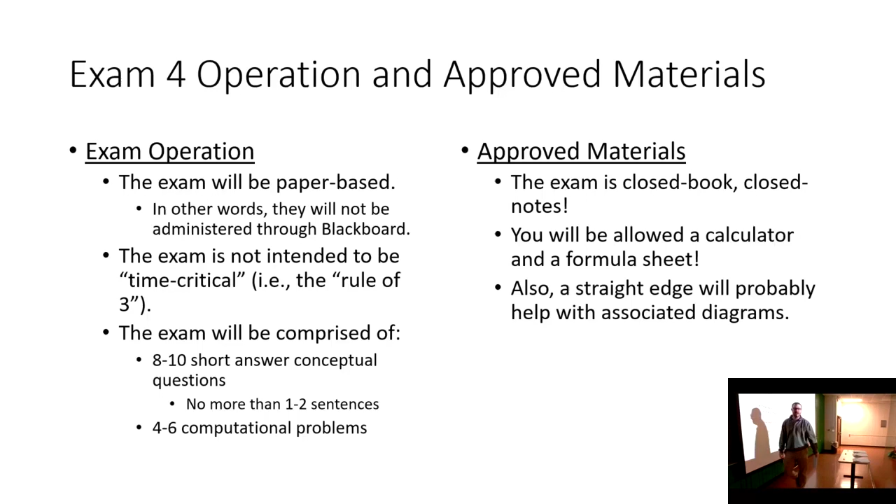Okay, so first off, the logistics. We're doing it in here, in person, on paper. It is about twice the length of a normal exam, and it is comprehensive, all right? It'll have about 8 to 10 short answer questions and about 4 to 6 computational problems. That's what you can expect. The exam is closed book, closed notes. You can have a formula sheet and a calculator, and I do think you should bring a straight edge. I think that would help. On the formula sheet, same rules as before. You can put anything you want on it.

I am going to make a slight addendum to this. When I say collect them after the exam, as you're turning your exam in, I'll take a look at them, and I'll probably just give them right back to you, because I want to make sure that you have your formula sheets in your notes for later courses and whatnot. The finals I keep, but the formula sheet I'll let you have. You don't need to waste time on your formula sheet with properties of centroids or things like that. I will provide those on the exam if needed. Don't include any fully worked out problems, and make sure that you prepare it yourself, that you're not just snipping stuff out of the slides. Although at least these slides will give you a good little guide on what to put together. Here's the class, and here's what's on the exam.

So first off, we started with the fundamentals. So make sure that you understand classical motion. Make sure you understand Newton's 3 laws. Make sure that if I give you the mass of an object, that you can compute its weight by multiplying by g, the acceleration due to gravity. Make sure that you can convert units and perform dimensional analysis as appropriate. And really the key math concepts in the class are algebra and trig. We did a little bit of calculus. We needed it to understand centroids, but really algebra and trig are where it's at. The first main exam was on particle statics, and basically what that was about was adding vectors.

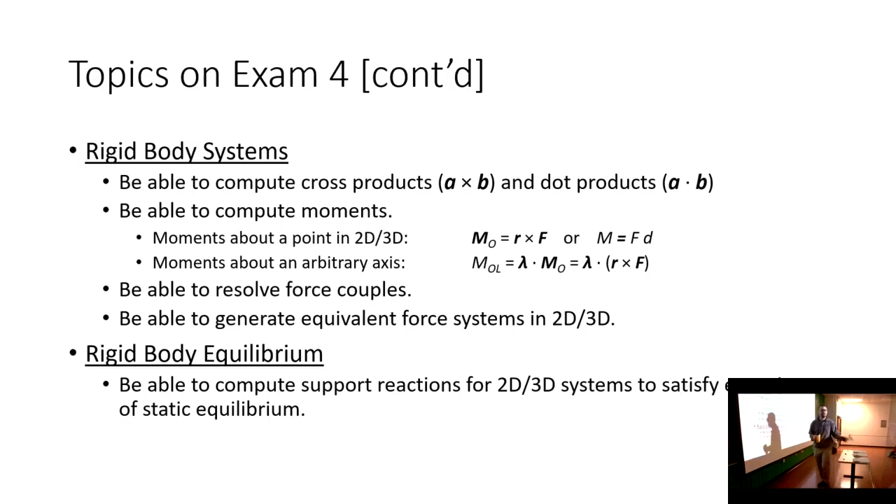And I mentioned this on the recording I posted last night regarding the exam, but if there was any one topic I would urge the class to study, and we're going to probably do some problems Friday devoted to this, it's support reactions. Because if you get the support reactions wrong, then the truss analysis or the shear and moment diagram is not going to be right. So it's a really critical step in the analysis.

Speaking of, excuse me, sorry, my voice is still restoring.

Exam 3, the name of the game was centroids and structural analysis, so make sure that you can locate the centroid of areas, lines, and volumes, and that you can compute the moment of inertia. Structural analysis, again, support reactions, big important step. Make sure that you can compute the internal forces in members of plane trusses using the method of joints or sections, and that you can draw shear and moment diagrams.

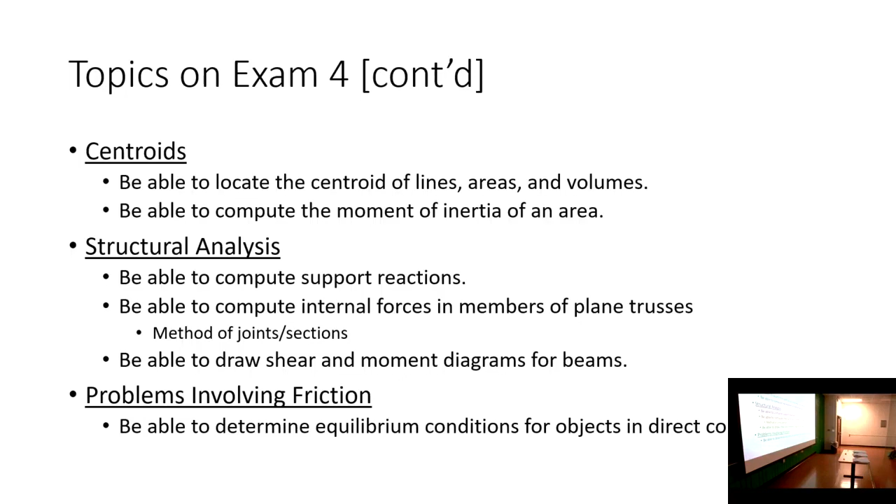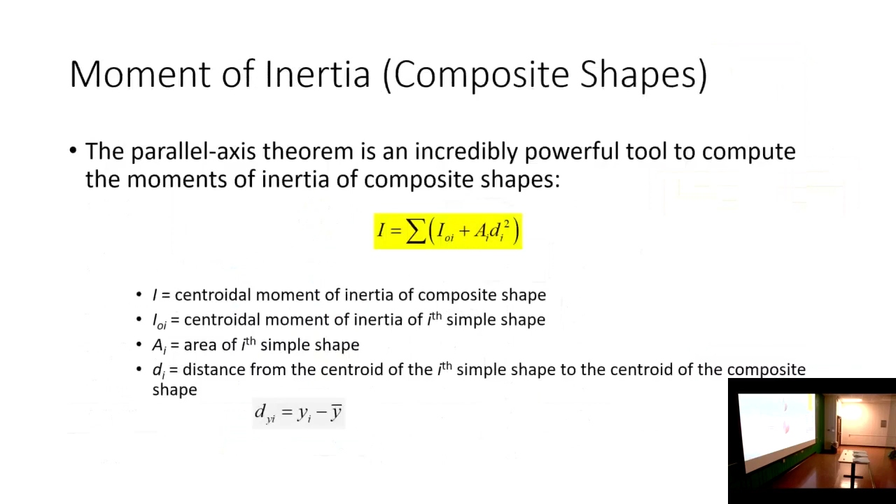The only real new topic is problems involving friction. So make sure that you can determine equilibrium conditions for objects in direct contact. So that is the content of the exam. That's what the exam is going to cover. The rest of this is just a lot of the formulas and equations that we've used throughout the semester. I'm happy to go through this in detail, but we've seen all this before, and I have this slide deck posted on Blackboard right now.

Does anybody have any general questions about the exam logistics, about what to expect on the exam, anything like that? I'd be happy to address them. Yes? I think for the short answer part, looking at the short answer questions on the other exams is a good idea. It's not a bad idea. The other thing I would suggest is just to go through the notes. We did have certain lectures that were a little more content heavy than others.

So for example, when we were getting up to exam 2, we had a lot of lectures that were about defining moments and defining the equations and cross products and dot products. And then later on, it was just, okay, let's just do a bunch of problems. So it might be worth it to focus on reviewing those types of lectures, the lectures that were earlier on in the modules listed on Blackboard. So for example, if there's topic 2 on particle statics, maybe the first couple lectures as opposed to the last ones. Does that make sense? That makes sense, everybody else? But yes, I will say that the questions that you will get on the exam are very much like those that you got on the last 3.

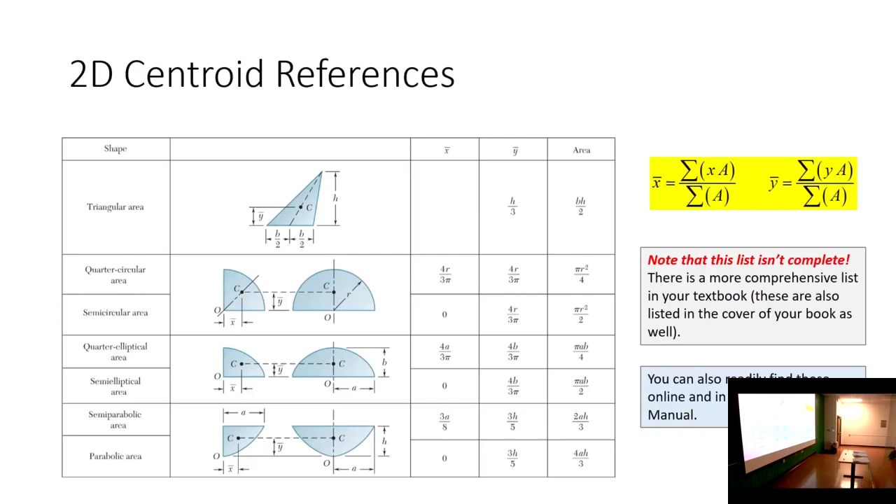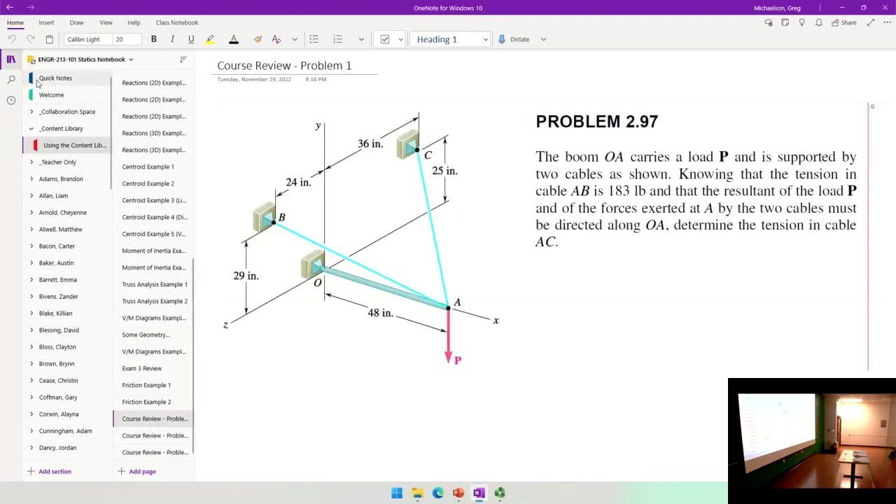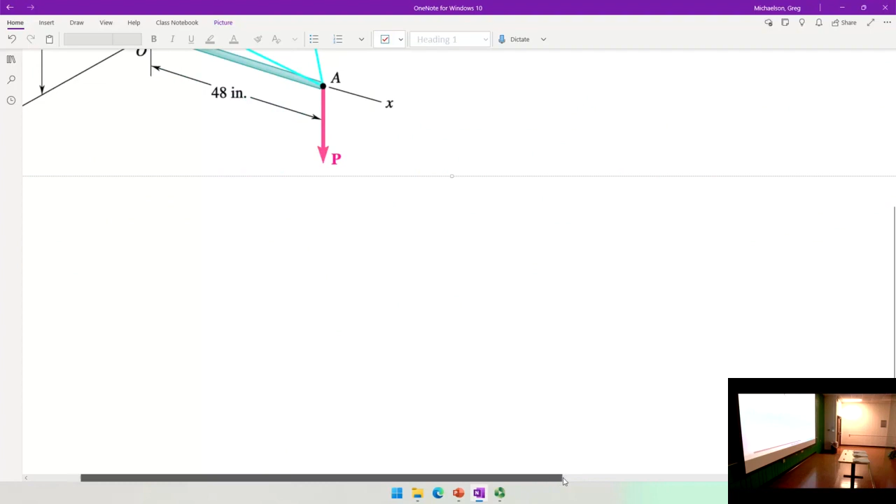All right, since we're here together at 8 o'clock in the morning, let's do some problems. Now, I've prepared 3 problems. There's a good chance we won't get through them all. And I'm going to go ahead and tell you, these are among the trickier problems that I would give you. These are probably more difficult than some of the ones I've given you even on homeworks. But again, the idea is that if you can do these, you can do just about anything.

All right, so let's start off with this one, okay? So the first thing I should mention is that I will say one thing, if this helps. Bless you. I am not one to give a comprehensive exam out of order, okay? So the first problems are going to be about the first stuff in the class. The last problems are going to be about the last stuff we talked about. So, as an example, the last computational problem will be the one with friction. Does that make sense? So I won't put a friction one in the middle of the exam. I don't like doing that. So this is an early part of the semester problem.

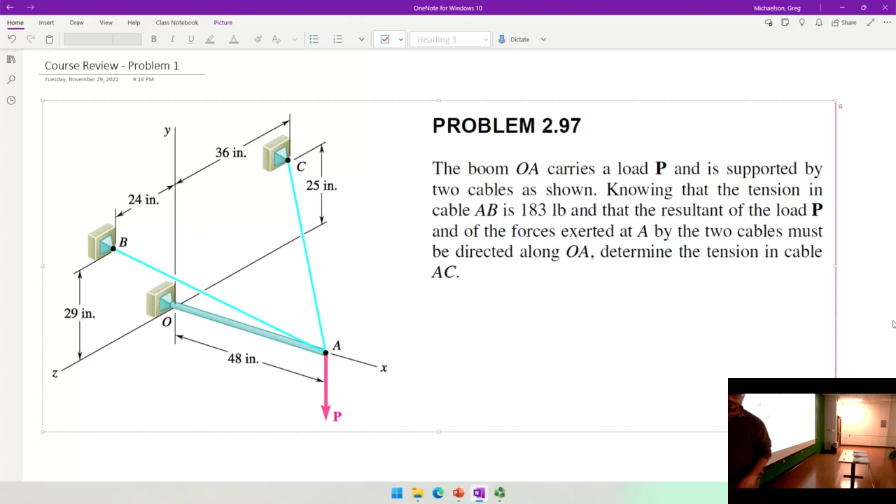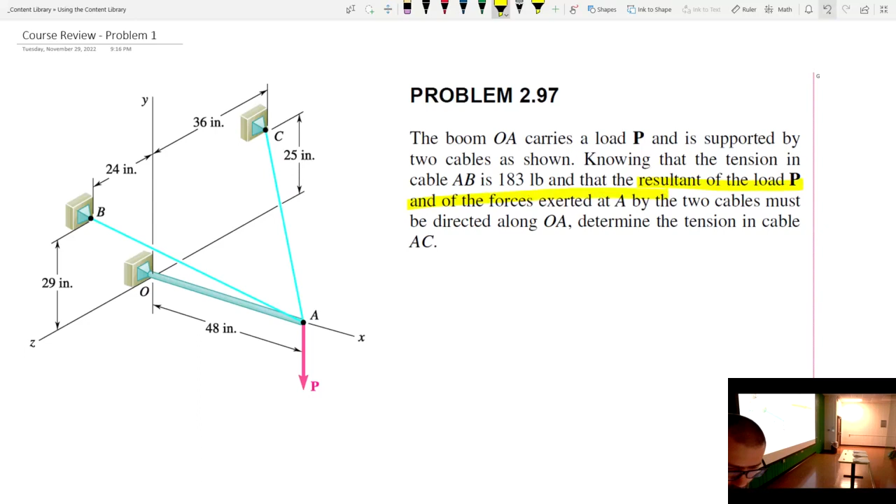So I have a boom that carries a load P and is supported by two cables at point A shown. Now we know the tension in this cable right here is 183 pounds. And we know that if we add up these three loads, read this right here. This is a really key statement. I'll highlight it. Let me get my little pen here. Oh, I can't draw a straight line.

We know the tension in this cable is 183 pounds. We do not know the tension in this cable, but we know that the resultant of the forces exerted at A must be directed along this line. Based on that knowledge, what is the tension in AC? And I'm sure some of you are like, whoa, what is going on here? Okay? Let me show you what's going on. So, a couple notes.

This is a particle statics problem. In other words, here's point A. We have this P vector, TAB, and TAC. So I'm drawing this point right here. We have forces all going through point A. So this is a particle statics problem. So there's no moments. If you look at this problem and think I got some moments, you're doing something wrong. Okay? So that's the first note I would mention. The second note I would mention is this highlighted portion. Okay?

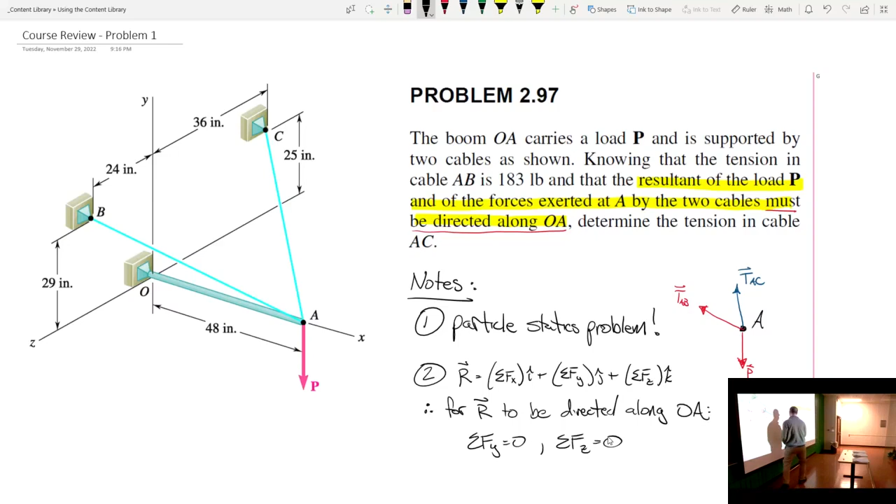Along what axis is OA aligned? Say again? The x-axis. OA is along the x-axis. So, for R to be along x, these two have to be 0, right? Because the resultant will only be along that axis. So those two have to be 0. So with that, we can do some work.

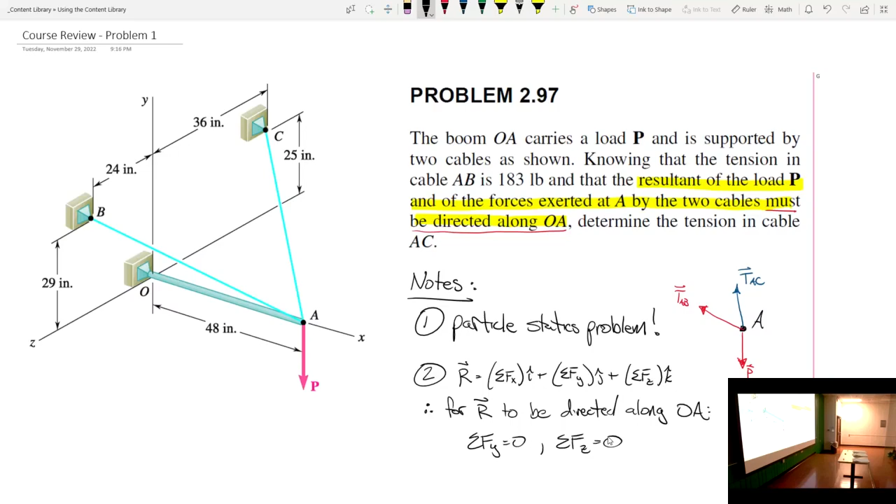The first step is to describe the vectors in 3D. Okay? And actually what I should do is make sure that we're clear. Describe the force vectors in 3D. Now, how do I describe a force vector in 3D? I first define its distance vector, divide that distance vector by its own magnitude, then multiply by the magnitude of the force to get the force vector. Okay? So let's describe AB and AC.

All right? So AB. So let's see. Along the x-axis, we go negative 48. Right? Along the y, that's vertical, we go up 29. And then along the z-axis, we go 24. Does everybody see that? So 48 along the x, along the y, we go up 29, and then along the z, from here to here, it's 24.

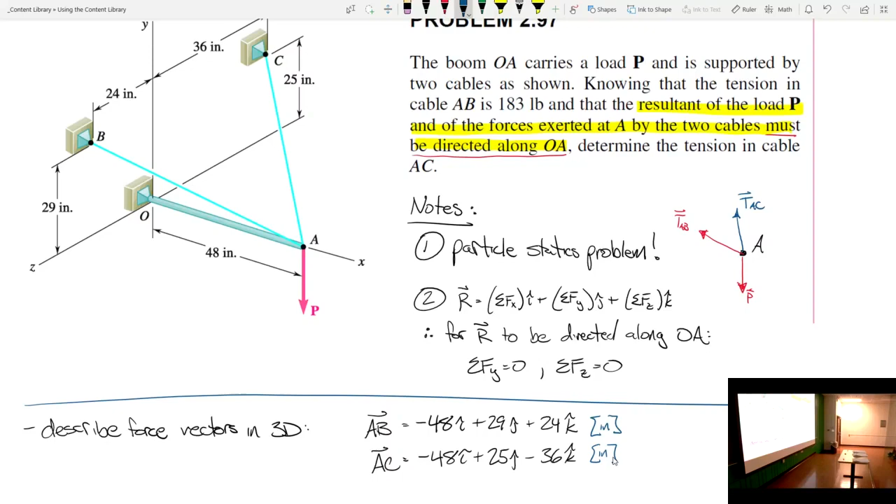For AC, it's still 48i. Now our y changes. Instead of 29, it's 25. And now we're going negative 36 along the z. Is everybody okay with that? All right. So what we'll do then, determine the magnitude of these.

And given the fact that we're just doing some review problems and that I know that you all can do these calculations, I'm going to do a lot of these computations for you. So when you chug this one out, you get 61 inches. So therefore, lambda AB is just going to be that.

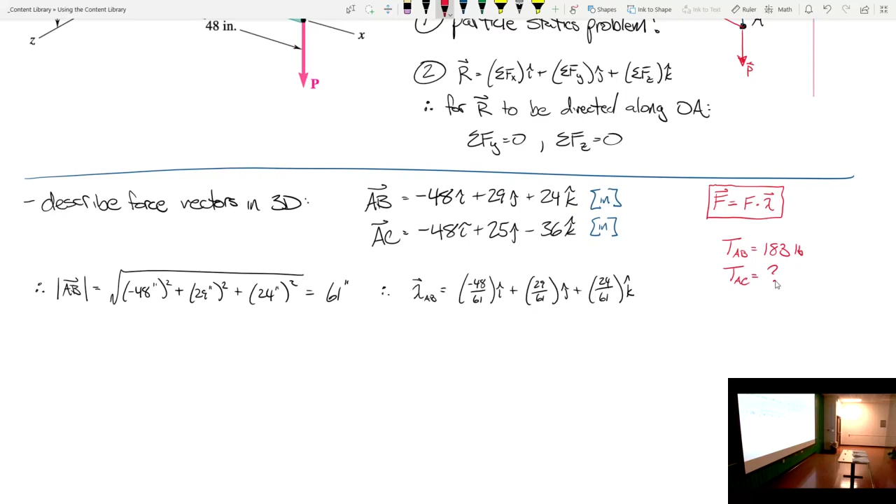Now, in this problem, let's be clear, all right? Let's just remember a couple things. We know that a force vector is equal to the magnitude of that force times the unit vector, right? That's our base expression that we're using, okay? We know, in the problem, that the tension in AB is 183 pounds. It's tension AC that we don't know, okay? So what that means is, if I want to determine that force, I can go ahead and numerically evaluate it right now.

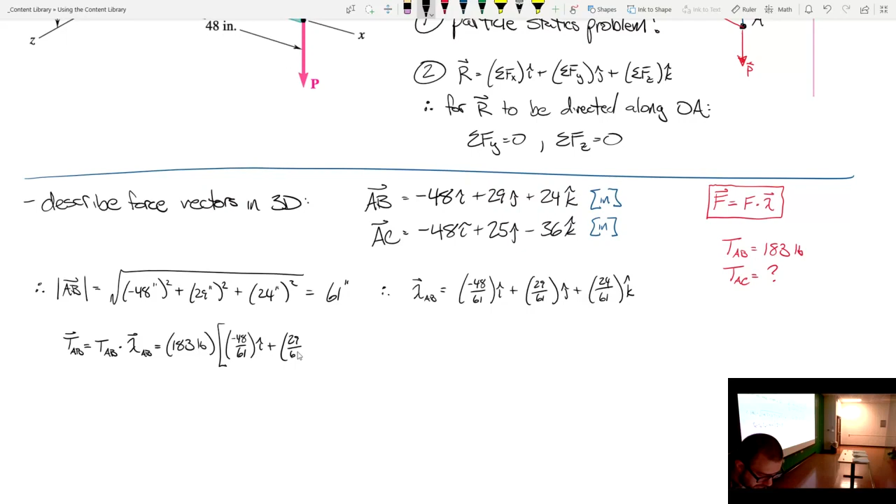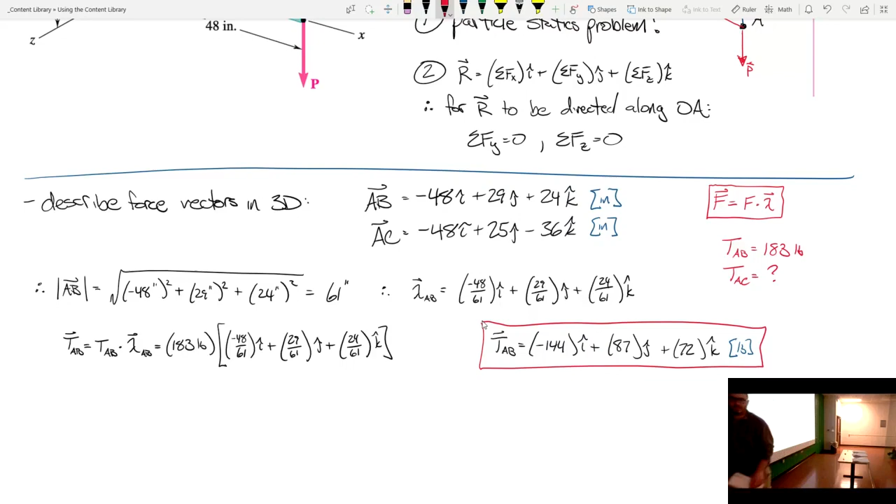So checking that out, I get, it's actually pretty nice. Comes out in nice even numbers. So that's one of my vectors right there. Do the same thing for the next vector.

As I'm going along, is everybody following along? Is this too difficult? If you have any questions, please interrupt me.

So we determine the magnitude of this vector. And when you plug and chug this, you also get an even number. You get 65 inches. All right. So now we're going to do the same thing. The only thing is that we don't yet know what the magnitude is. So we're going to have to leave that as a variable.

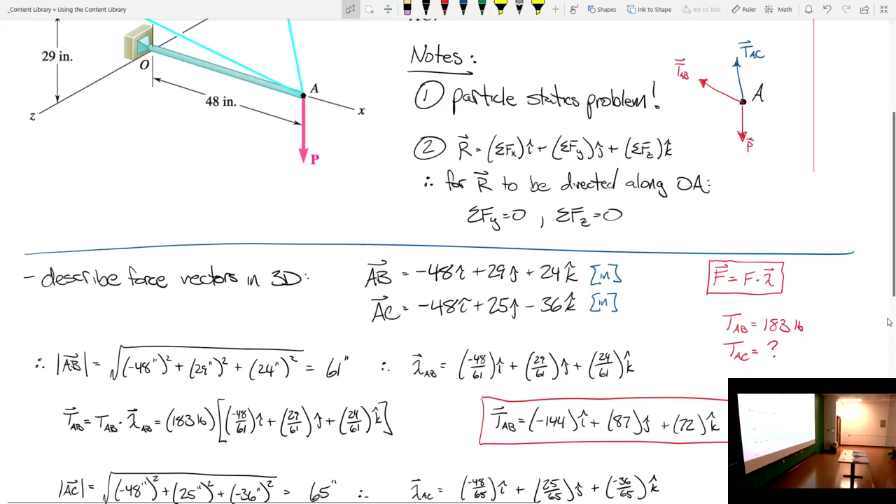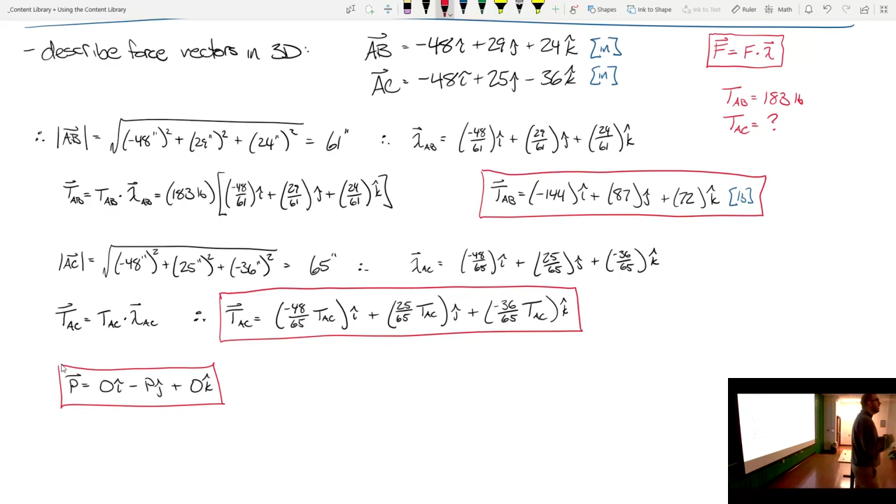Now let's not forget, there are three forces acting through this particle, and one of them is P. So we have to describe that one as well. But P is really easy. He's just that. Because it's just a force acting vertically along the y-axis. All right, is everybody with me so far? Is this making sense? Tell me if it's not, please.

Okay. So now what I need to do is sum these vectors up in order to determine a resultant. Okay? So what I'll do is I'll write them sort of tabular. That's an I. And so what I'll do is sum each of these up. But instead of writing all this out, let's just be common sense about it.

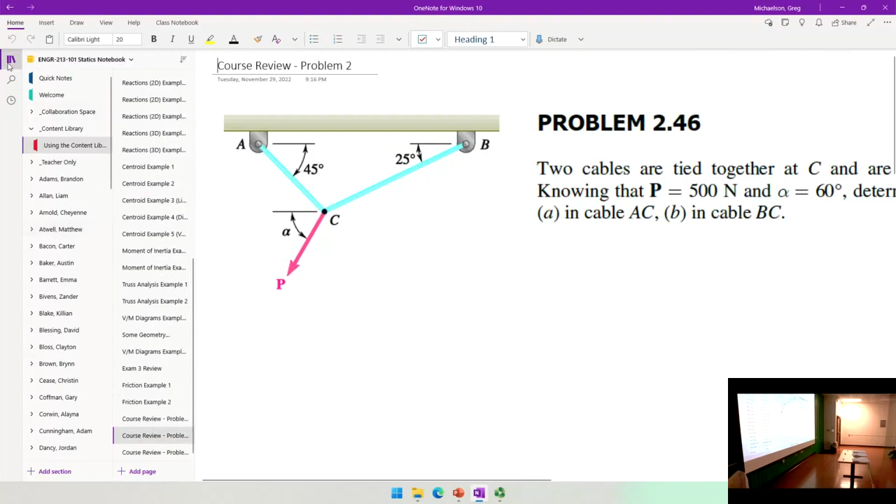All right. This one's probably not as challenging. It's pretty straightforward. But everything's at an angle, so we just got to be cognizant about some things. Now, the last problem was not an equilibrium problem. This one is. This one is a particle statics equilibrium problem. I'll say notes.

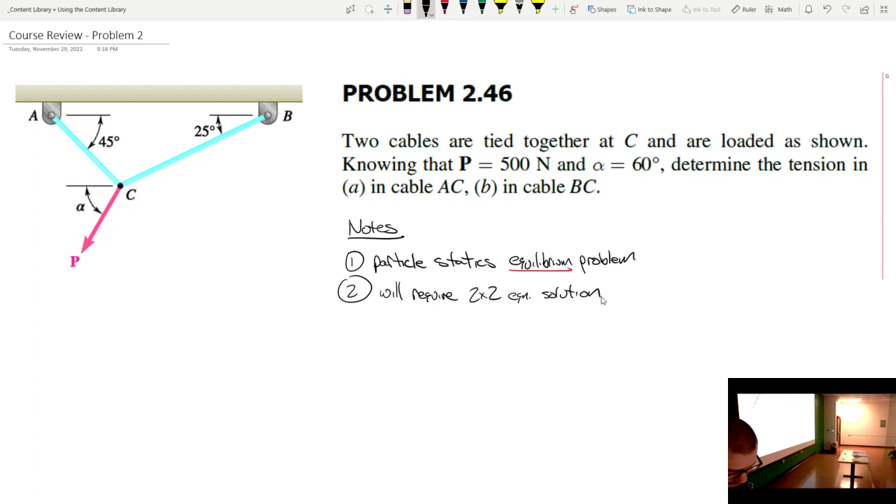It'll require a 2x2 equation solution using IJ notation. Now I will go ahead and tell you, you can actually get around using an equation solver if you use the law of sines and the law of cosines. I get the feeling y'all don't want to do that, so we'll do it the standard way, which is fine.

So we'll start off with a free body diagram of particle C. So what that means is we need to draw particle C and all of the forces that are going through it. So, tension BC. That's going to be a 25-degree angle, right? Because if I have a parallel line cut by a transversal, and I know that's 25 degrees, I know that's 25 degrees.

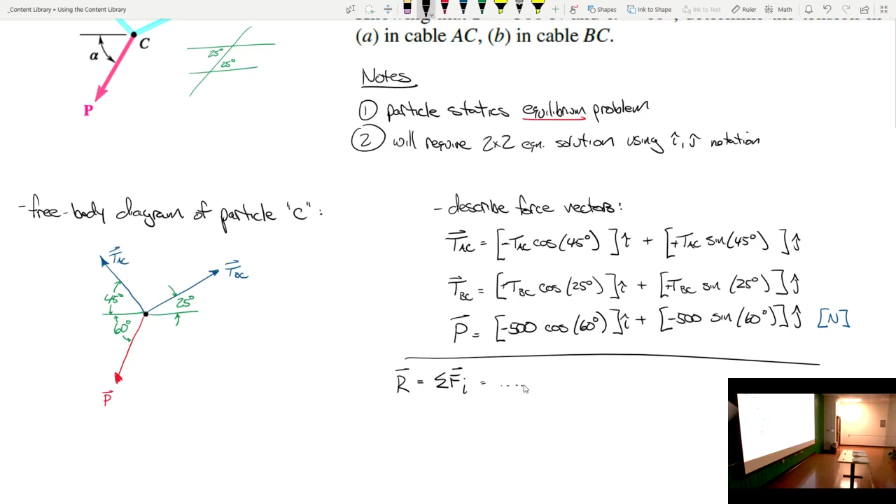So we need to sum these up. Again, what we're doing is summing the forces in the x direction, summing the forces in the y direction. But this is a static equilibrium problem. We know both of those sums have to be zero. So, down just a little bit. And again, they have to be zero.

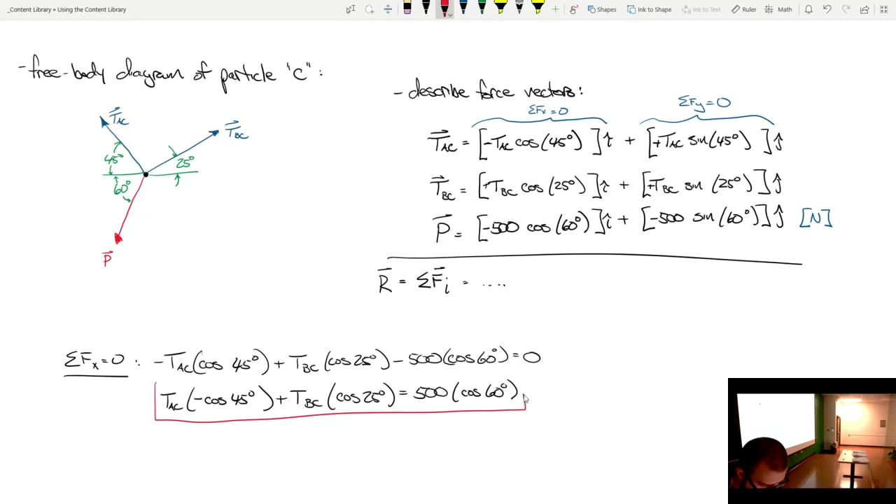Now what I'm going to do is I'm going to write it in sort of matrix notation. TAC. There's our first equation. We scroll up a little bit so I can still see what's going on. So just move that over.

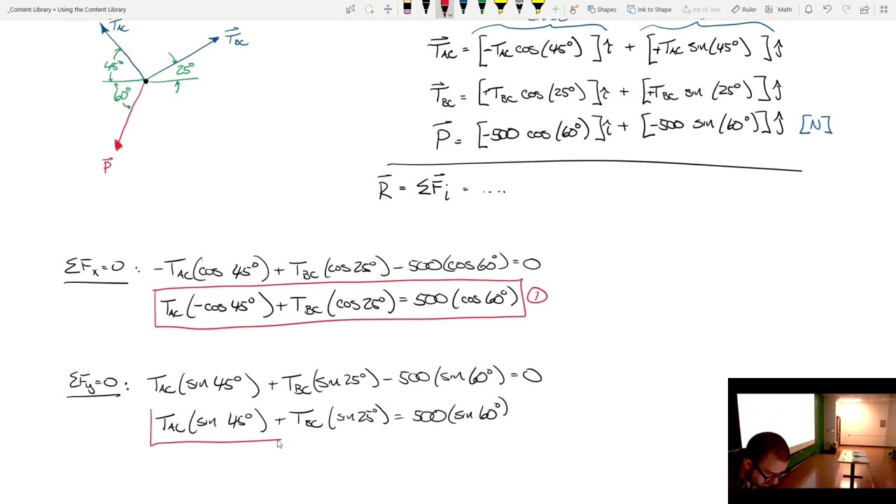Write it in matrix form. There you go. So I'm just doing bam, bam, bam, bam, and then those constants. And then you, excuse me, plug that into whatever solver you'd like. So if you use the Casio, it'll give you an X and Y of. So therefore,

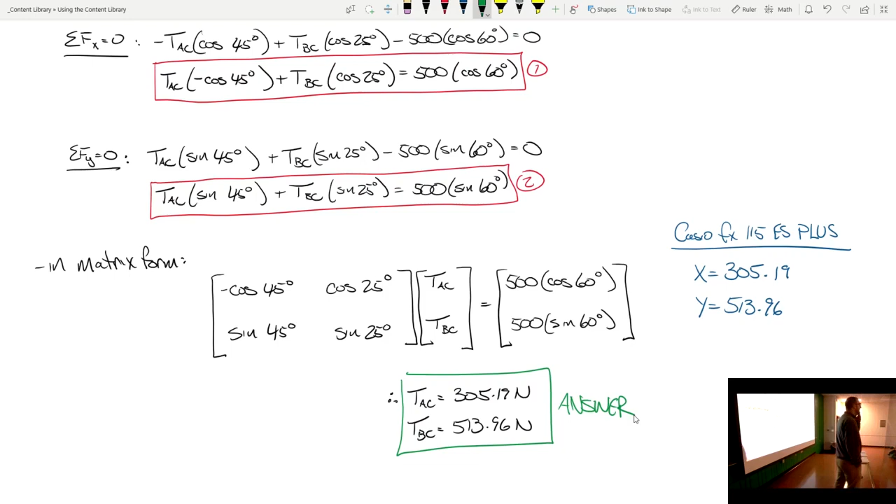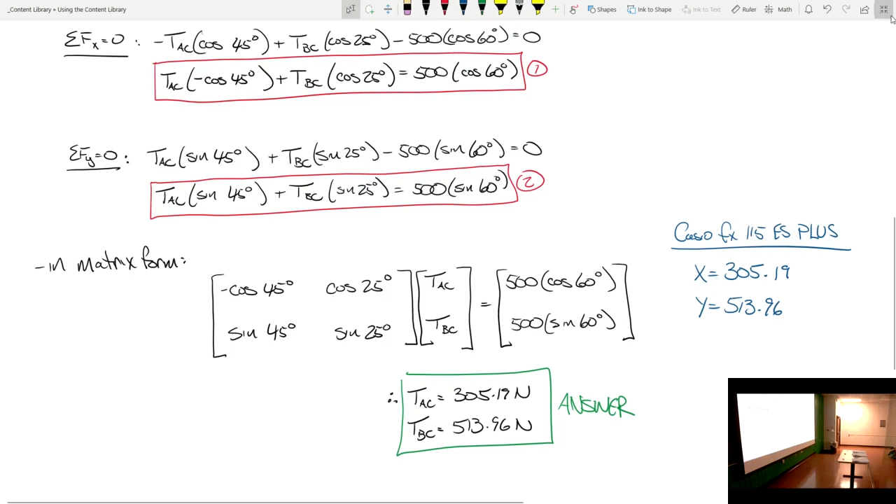Let's see how we're doing on time. All right. We'll take a look at the next problem, but we're not going to have time to do it. We'll take a look at that one on Friday. But I want to stop for a second and see if this makes sense. Anybody have any questions on this? Okay. I want to take a look at the next problem. This is a weird one.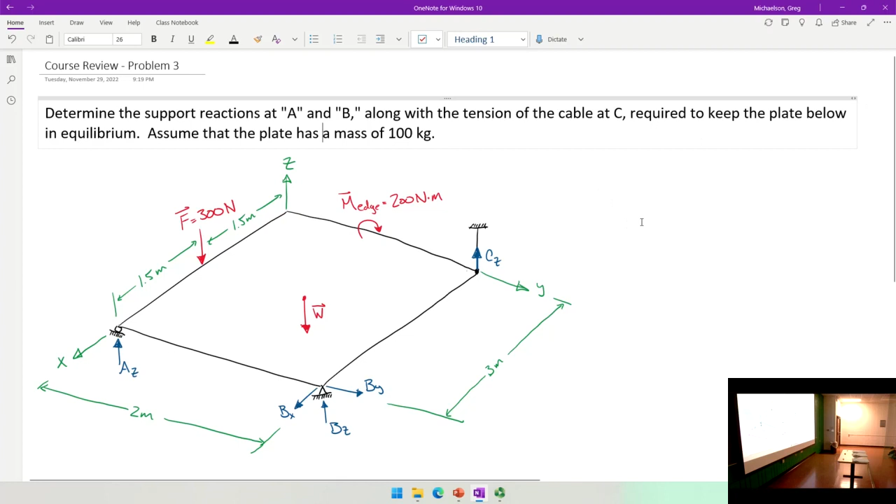So this problem, we have a plate. So what I'll say is, this is a rigid body equilibrium problem. And what we have is a roller here. So a roller only carries one reaction. We have a pin support here, which in 3D carries all three. Then we have a cable here, keeping this plate up. We were given the plate has a mass of 100 kilograms.

We need to determine all those reactions. But the weird part is that there is a moment about the edge of the plate. And I'll tell you, that's actually the easiest part of the problem. All you do is you use your right-hand rule and say that this moment is negative 200J. It's really easy. But we'll go through that one on Friday. Let me ask a real quick question. This one will take us about 15, 20 minutes.

Is there any other particular types of problems you'd like to look at on Friday? Because I know what I want to do. I want to do a couple reaction problems. Seemed like that was what tripped everybody up on the last exam. Sure, we can do that. We'll do a quick one because that can take a little while. We'll probably do like a T-beam because that only has two shapes. Anything else? Because that'll be a good review of centroids as well. So we'll do a T-beam and a couple reactions. We probably won't do trusses and shear moment diagrams since it's so fresh in everybody's head. We just did it. This is more about the stuff we did back in the day.